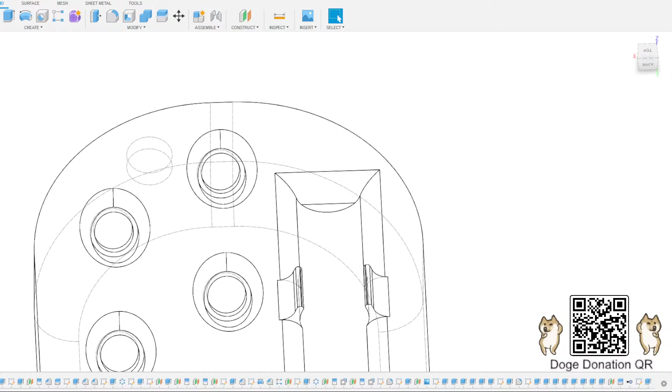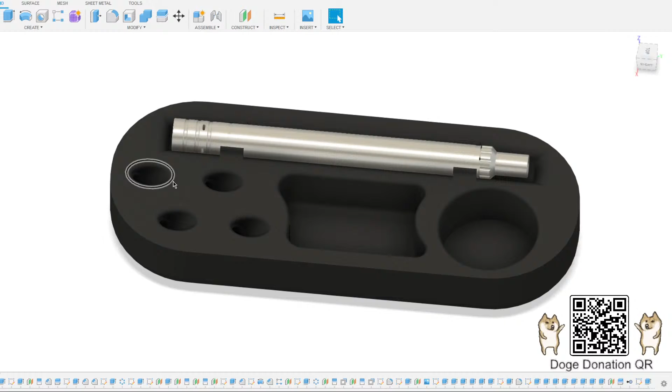Let's go ahead and get into the purpose of this video. One of the things I didn't think about is that with this case we've got here, we want to make sure—let's put this back in shaded view—we want to make sure these holes, while we know the tolerances we want for them, for a 3D model, for two 3D printed surfaces to interface with each other.

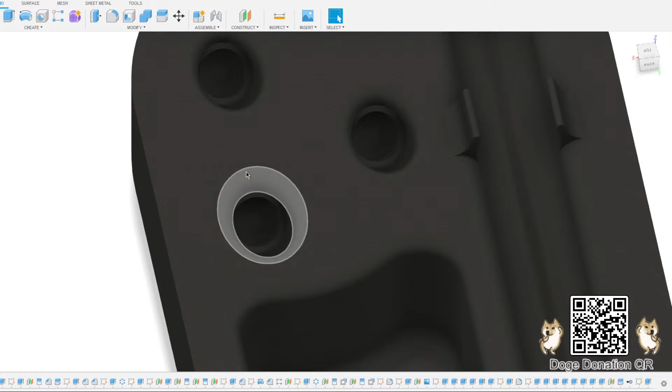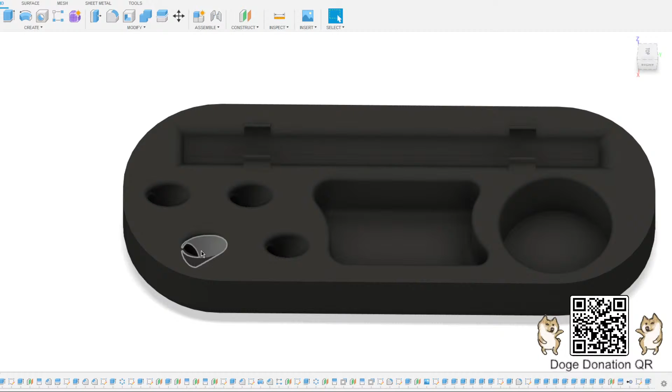However, we need to make sure these are going to work right for our parts before we go and spend the time to print, because this is going to be a 5-hour print with my settings and speed. So instead of printing this whole thing out, wasting all this plastic and finding out this hole isn't the right diameter, or our little magnet holes here, making sure maybe they're a little too tight, what we need to do is we can just make a simple little fitment test.

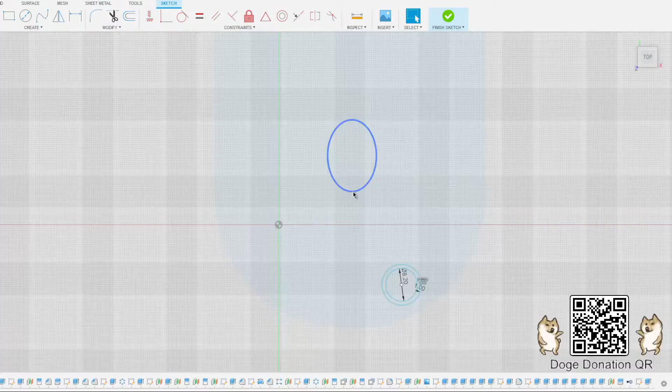I guess we could do the magnet holes first. It's fine. So 8.20, I did this last night. I know these holes are much too tight—there's no wiggle room, they basically snap into place. So let's start a new design.

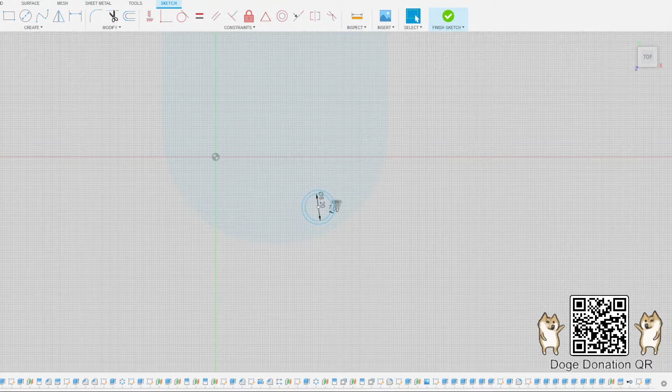Basically what we would do is take our holes here—this is one for our magnet. Let's go ahead and model it up right quick. Give it an offset.

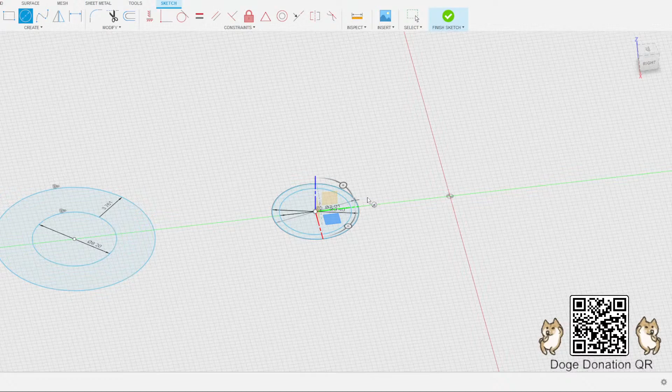But anyways, let's go ahead—seven oh one, 8.40, and then what was our last one? 8.65. I don't know why I had the 8.65 there. I think that was for the—yeah, I'm not sure what that one is.

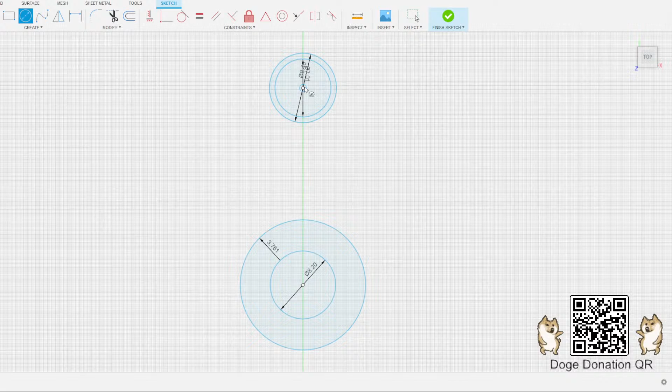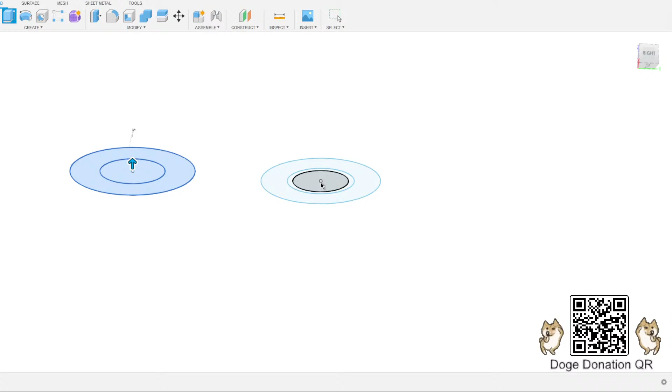Let's actually just add a—sure, that's fine. So—yeah, that's our bottom. Let's give these a base of -3. That's fine.

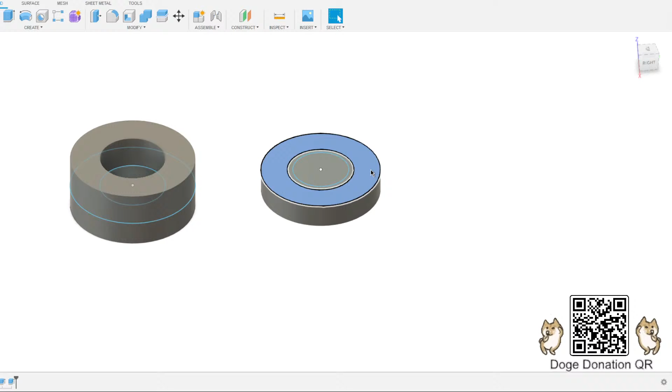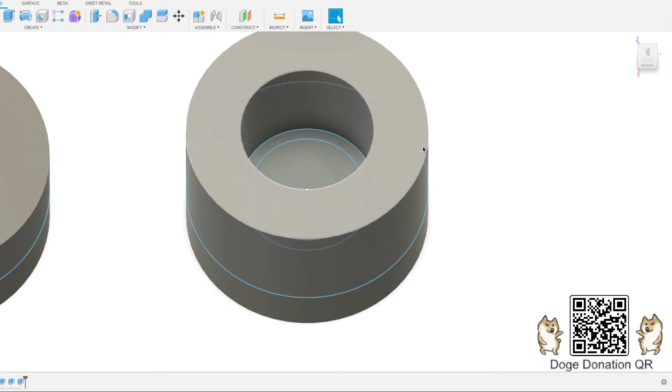And for this, needs to go up 7, if I recall correctly. 7. Let's see. Let's do 10.

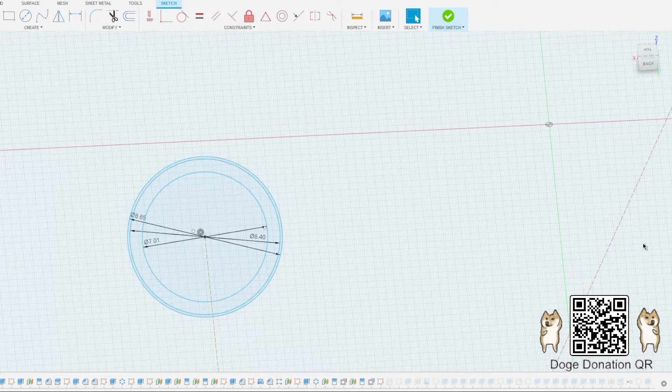So this would basically be, you know, use your dimensions, make a simple little setup like this. Nothing fancy. So we have a little test slug for our magnet here on the left, and then for the atomizer holes, this would be the test for that as well, just to see if everything fits before you go and commit your time and plastic into, you know, a 5-hour model that you're not even sure about.

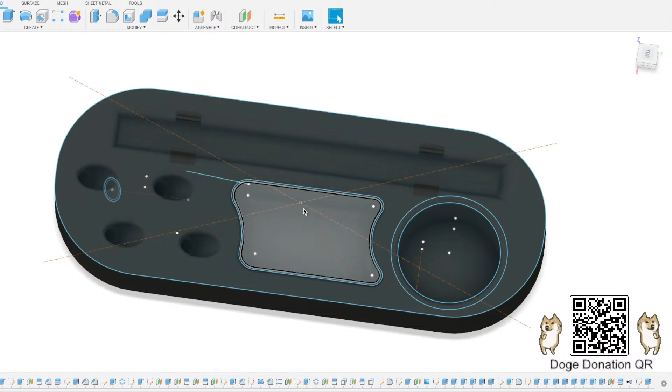This is why it's important to know what your offset needs to be in the first place, but it doesn't hurt to do this type of thing after the fact, because sometimes different materials—what works for one thing might not work for the other. So this means we're also going to have to adjust this hole as well.

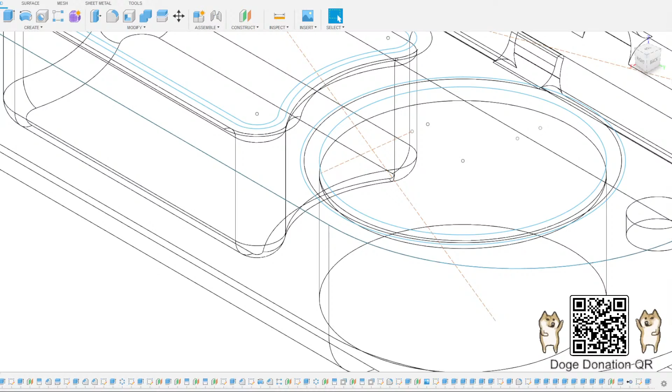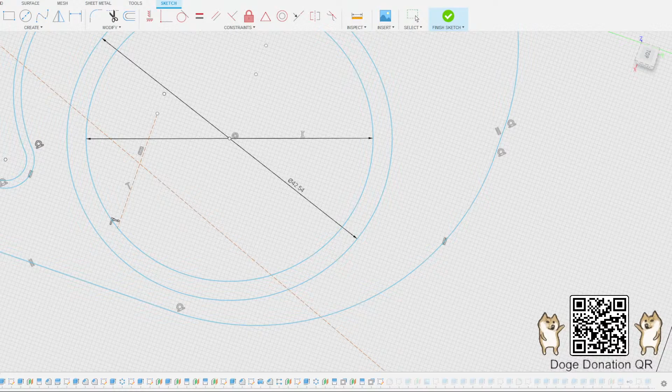So, and the thing is, okay, this is our inner diameter. So this is exactly the size. So let's see, we're going to do 0.30 because 20 was too tight for the magnets, so we'll do 0.30 there, and I'm okay with that.

But on these holes here, you can see that—if this is popping up or not, I still don't know. Yeah, I don't think it is. So it's 6.81 millimeters, and we have plus 0.20. So we've got our original measurement. You know what? One moment.

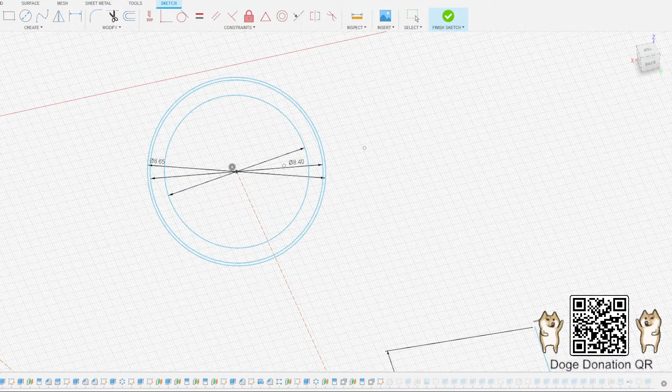So hopefully this pops up. You can see this is why I always put in my original dimensions on my sketch, because those original dimensions are not going to change. What I measured—we can go back and check them, which is what I'm about to do, if I could open up this package.

We're gonna measure again just for the sake of measuring again. Let's go ahead and change this to 7.2 millimeters, and then give it...

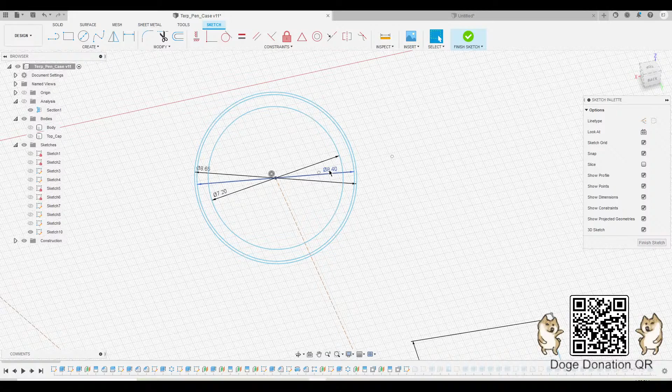And then at the widest point, 8.40 is going to be pretty much the outer wall of the bottom part of the atomizer. I'm not sure what this 8.65 is.

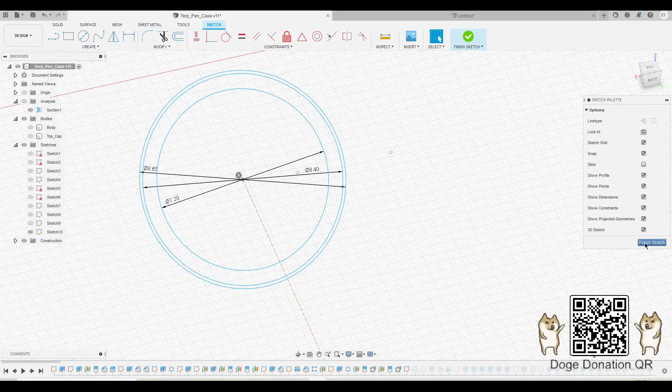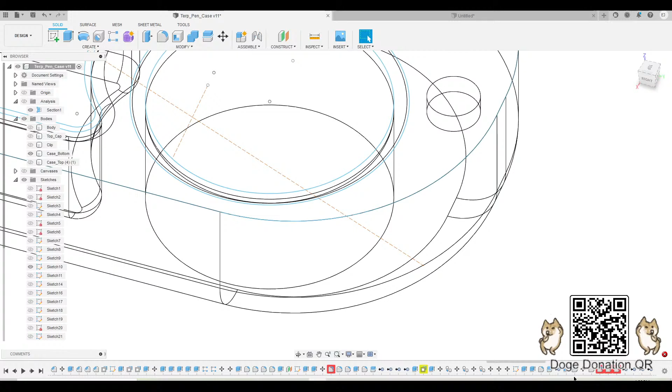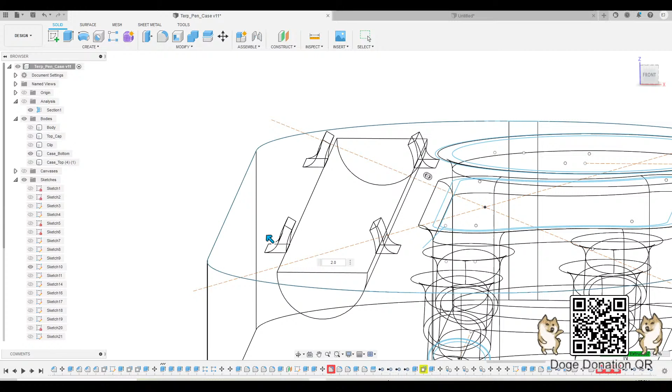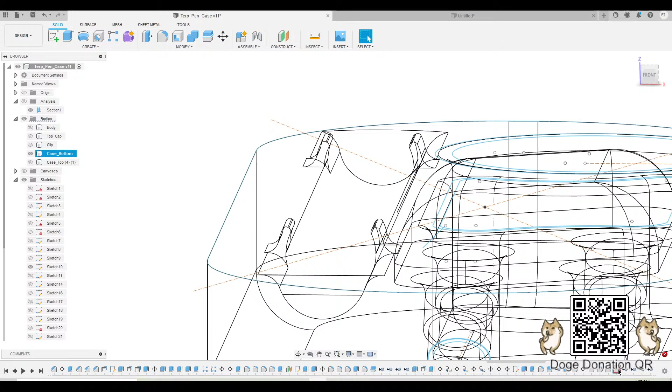Yeah, that one looks fine. I've got some fillets that aren't right. Not sure why I messed up those fillets, we weren't even adjusting those.

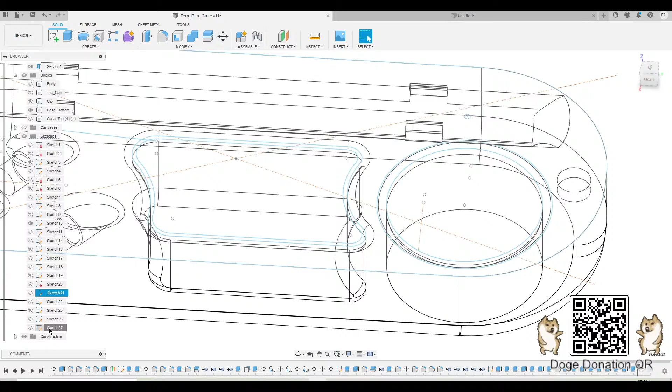Okay, now let's go down here to our circles. These are going to be for our magnets.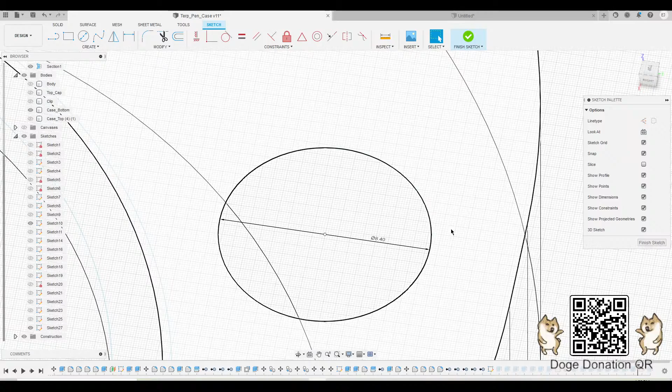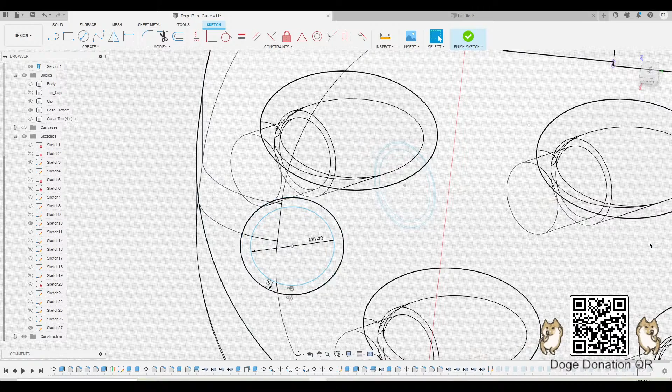8.20 was way too snug. It would be very hard for me to actually push those in without damaging, since we're gonna have to finish just a few layers above this, but I don't want to push down on the print too hard. So we're just going to make this offset much bigger, so it shouldn't have any problem fitting the magnet in there. Just drop it in and go.

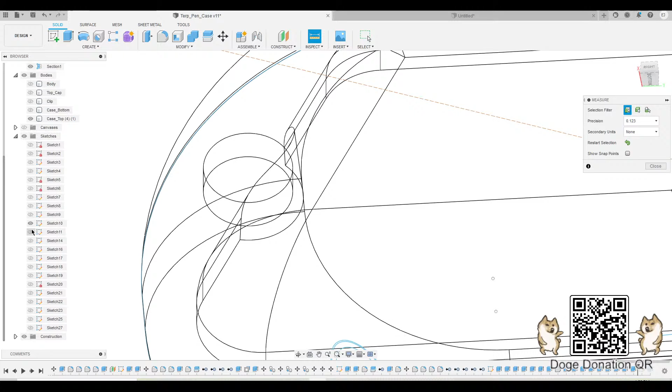Got to do the same thing for... well, no, we don't, since we changed the sketch. Let's make sure I don't need any surprises.

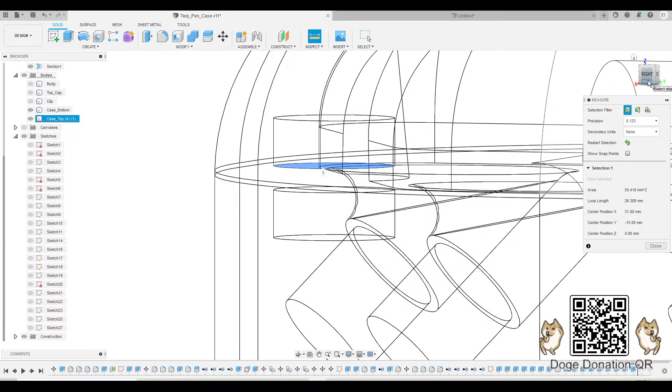Okay, yeah. That is a funky looking chamfer.

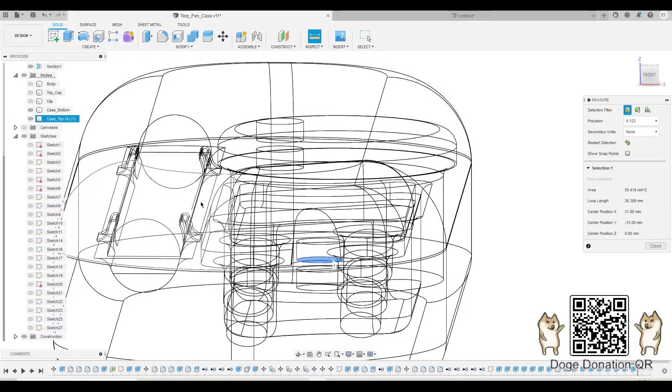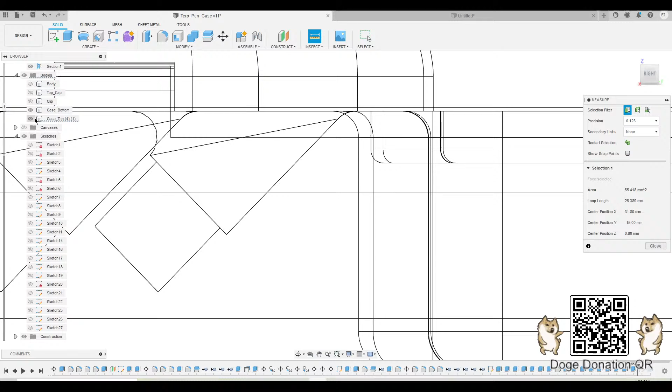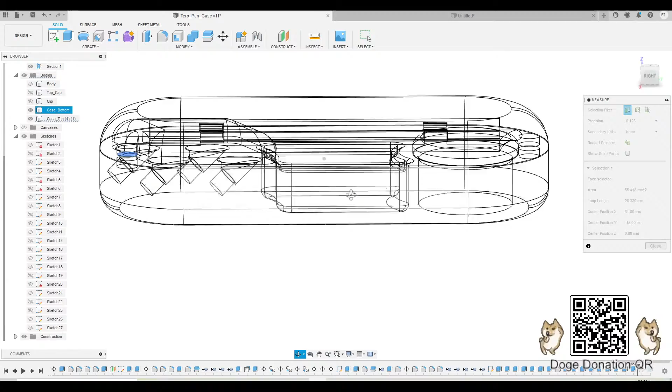Got our space there and our space there on that, so clearance is good. Yeah, and that's got plenty of space. Think that's gonna be just fine.

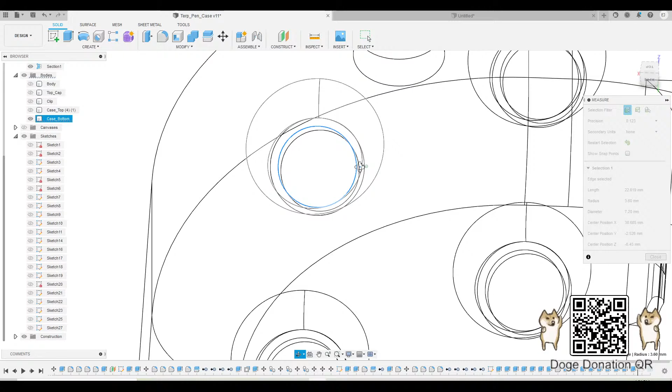Let's take our... I don't know why this keeps moving. Let's double check it again. 720.

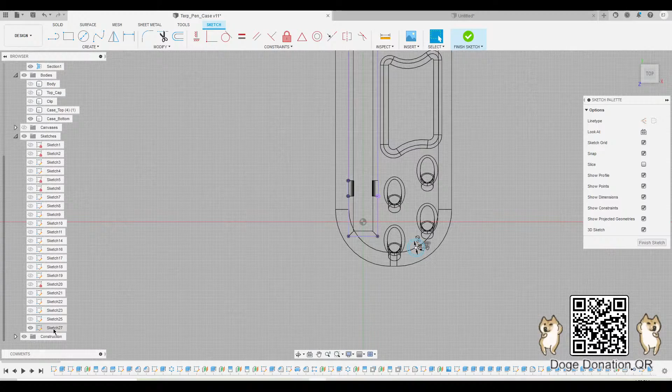Yeah, 7.20 is going to be fine. I believe it's going to fit in there just fine. Just fine. So what I'll do is...

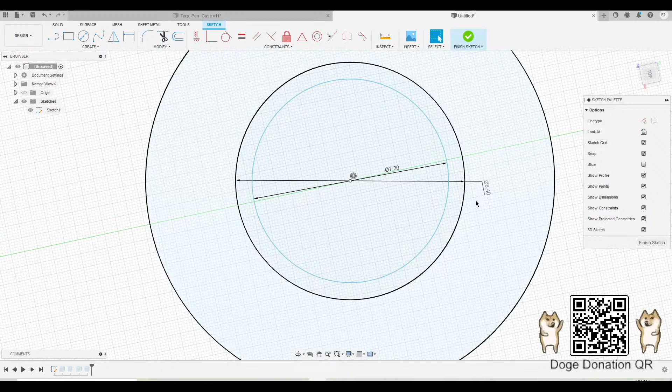So there's our test pieces there. We'll right click. If you ever want to save out a piece instead of saving these out individually in Simplify 3D, go up to the top of your project, right click, and save as mesh. It's the same as if you were doing it for an individual body. It's going to open up all the stuff there, but you're just saving everything out in the document, all your models, all that, everything.

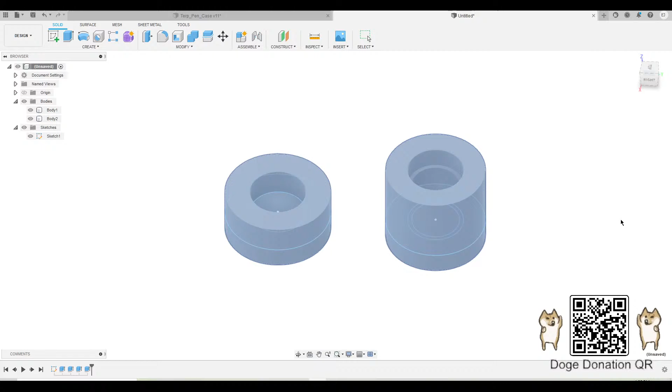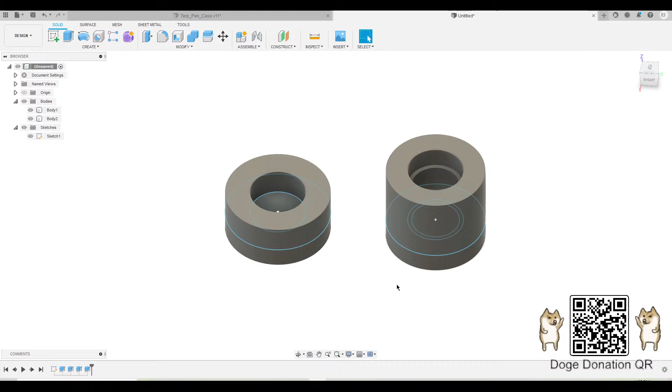See, and I've already done this fit test. We're going to replace it, send it over to our slicer, and then 3D print it. And if this fitment test works out good, then we're going to print out the bottom part of the case, and I'll update that later.